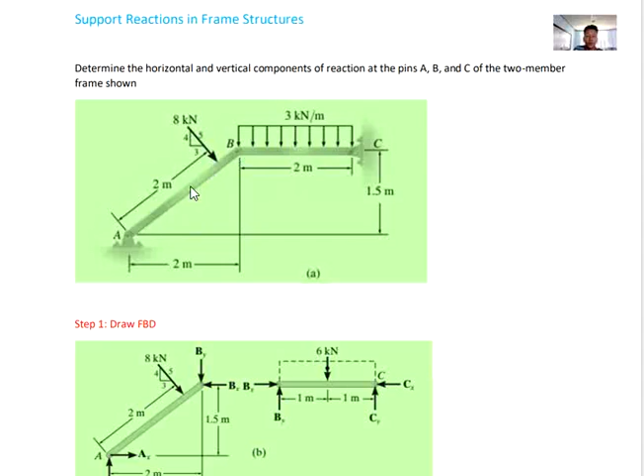Hi guys, this time i-discuss na ako ang another example sa frame structures kung saan pag-solve sa support reactions. So we are going to determine the horizontal and vertical components of reactions at the pins A, B, and C of the two-member frame. So this is a two-member frame, member AB and member BC. Again, this is frame structure because ang usa sa member is naka-incline.

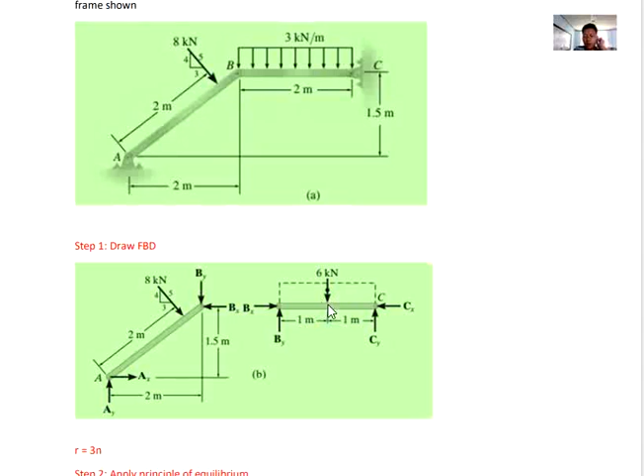Then sa member BC, as you can see, it carries 3 kilonewton per meter within this length 2 meter. So i-convert nimo siya sa concentrated load. So, para may mong concentrated, kuhaan ra nimo ang area, which is the intensity times the distance, 3 times 2. 3 times 2, 6 kilonewton. Then concentrated at the center of the rectangle or uniform load.

Then, after that, i-analyze nimo if sufficient ba ang equation of equilibrium to solve these 6 forces, 6 unknowns. To determine, to verify whether it is determinate or indeterminate, just use R equals to 3N. So ang R nimo is number of reactions. So there are 6 reactions. Then number of member, natay 2 ka member, AB and BC. So 3 times 2, 6. So therefore, this structure is determinate structure.

Determinate. Pag indeterminate, dili ka makasolve using equation of equilibrium. So ang equation of equilibrium nato is summation of moment equals 0, then summation of vertical force is equal 0, then summation of horizontal force is equal 0. So pag determinate, pwede ra nimo gamiton directly ang equation of equilibrium.

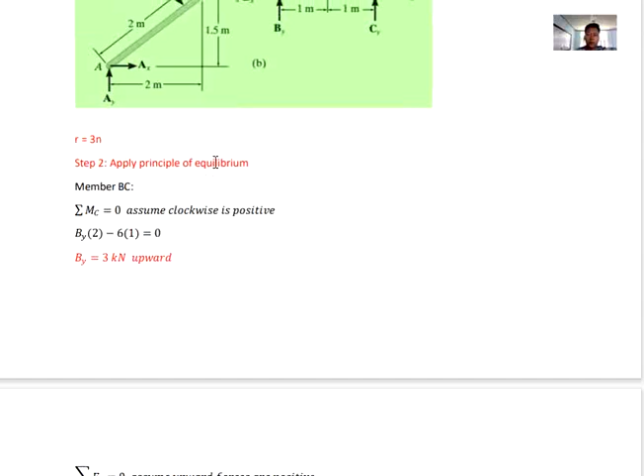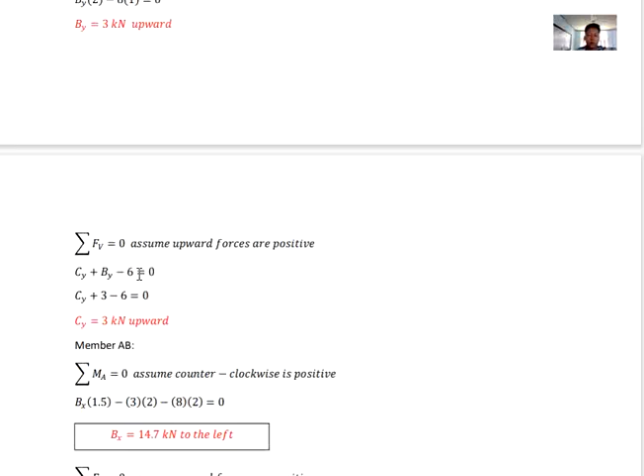And then, solve nimo si Cy. To solve Cy, just sum up vertical forces. Or pwede ka mag-moment sa B to solve Cy. Para madali, sum up lang nimo ang vertical forces. So, By plus Cy equals 6 kilonewton. Or By plus Cy minus 6 equals 0. Cy is equal to 3 kilonewton upward.

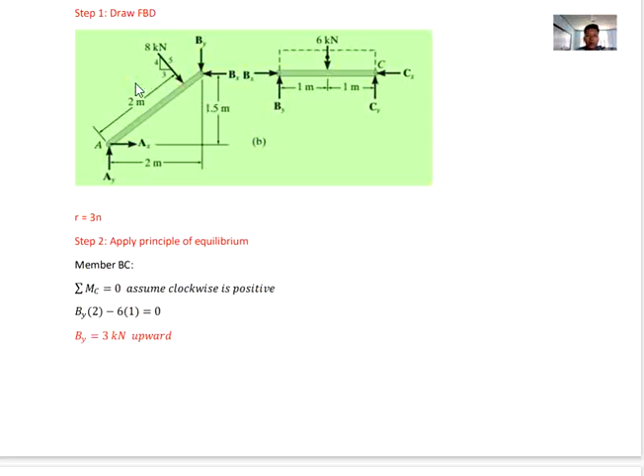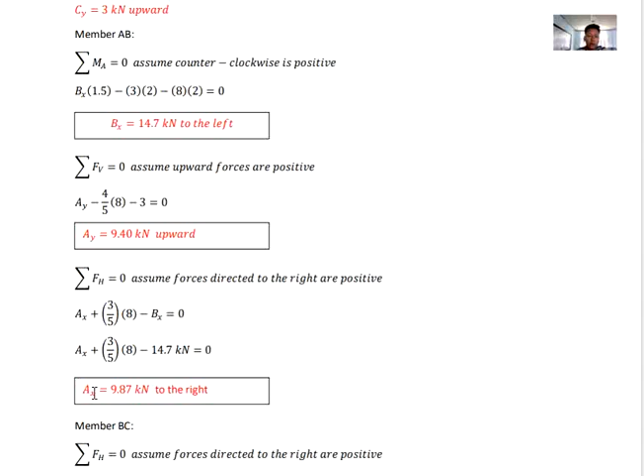Then napay isa ka unknown sa member AB, si Ax. So to solve Ax, just sum up horizontal force is equal 0. Then assume ang force going to the right positive. So positive Ax plus x component ani is 8 kilonewton times 3 over 5, or 8 kilonewton cos theta. Ang cos theta is 3 over 5. Positive kay going to the right ang x component niya. Minus Bx, ang value sa Bx is 14.7. Minus siya kay going to the left man ang Bx. So, Ax is now equal to 9.87 kilonewton, directed to the right.